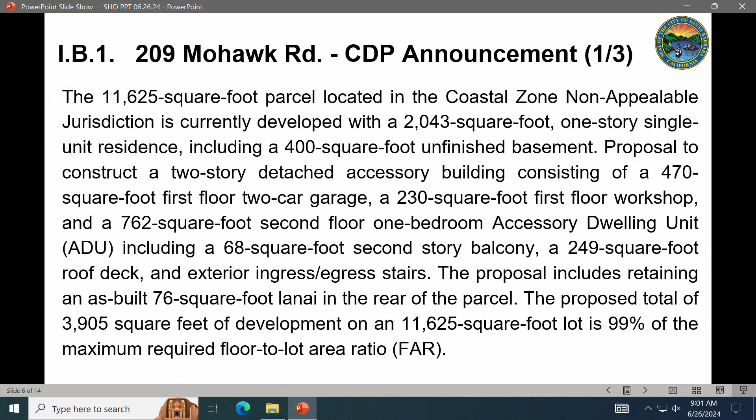The discretionary application under the jurisdiction of the Staff Hearing Officer is a coastal development permit pursuant to Santa Barbara Municipal Code, Section 28.44.110. When a proposed development includes the addition of an accessory dwelling unit to an existing single-family residence, the application shall be reviewed by Staff Hearing Officer without a public hearing in accordance with Subdivision J of Government Code 65852.2. Staff Hearing Officer shall not issue a decision on the application until at least 10 calendar days after notice has been provided to the public. Staff Hearing Officer may receive and consider written comments from the public, but without a public hearing. The announced decision will be the final action of the city.

Ms. Gu, I didn't see any written comments from the public. Were there any in the record? For this particular item, we did not receive any public comment.

Thank you. Very good. I'm appreciative of the staff report and the clear application submittal. I concur with the findings in the staff report and approve the project subject to the conditions in the staff report, and concur with the CEQA determination. That is the final action on the 209 Mohawk Road item.

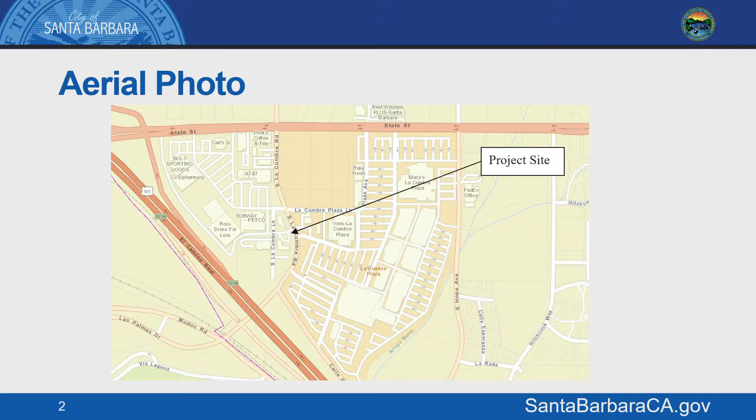There's like an echo.

So, as I said, the project involves two properties. The property at 110 South La Cumbre Road is developed with a 2,100 square foot, one-story non-residential building, and the property at 150 South La Cumbre Road is developed with a gas station, mini mart, and a hydrogen fueling station. The proposal consists of a lot merger to merge the two lots because the minimum lot size required for a car wash and gas station is about 8,000 square feet, so they have to merge the two lots. This slide shows that the lot size of 110 South La Cumbre is 5,600 square feet, and 150 South La Cumbre is about 31,000 square feet.

The general plan land use designation is commercial high density, and the zoning is commercial general, and it's also in the Upper State Street overlay.

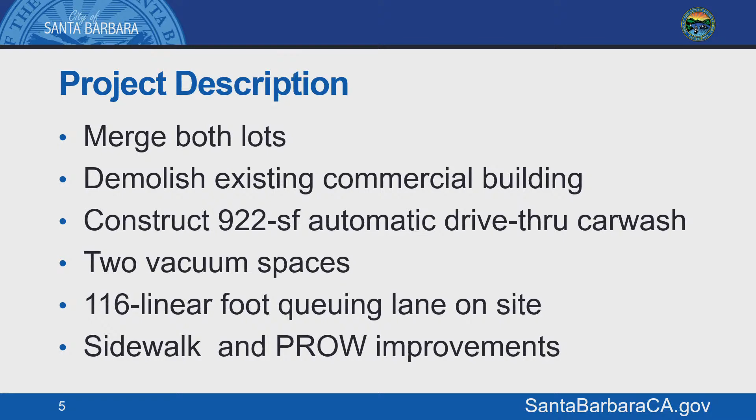I previously went over the existing development on the site. The project description is, as I said, merging both lots and demolishing the existing commercial building, currently a vacant veterinarian's building. They want to construct a 922 square foot automatic drive-through car wash with two vacuum spaces and 116 linear feet of queuing lane on the site. The project also includes sidewalk and public right-of-way improvements as shown on the project plans.

Here's the existing site plan, showing the gas station pumps in the center, that large square. Here's the mini mart on the upper part of the screen on South La Cumbre Lane, and to the right is the existing veterinarian's building, proposed to be demolished. In blue is the existing property line, which will be erased when they do the lot merger, and to the far left is the hydrogen fueling station.

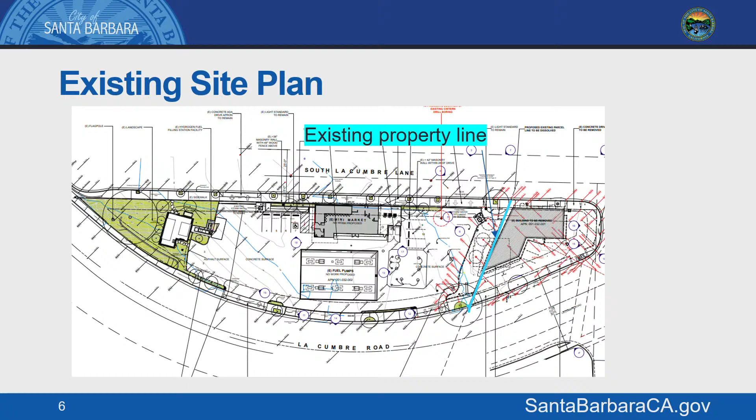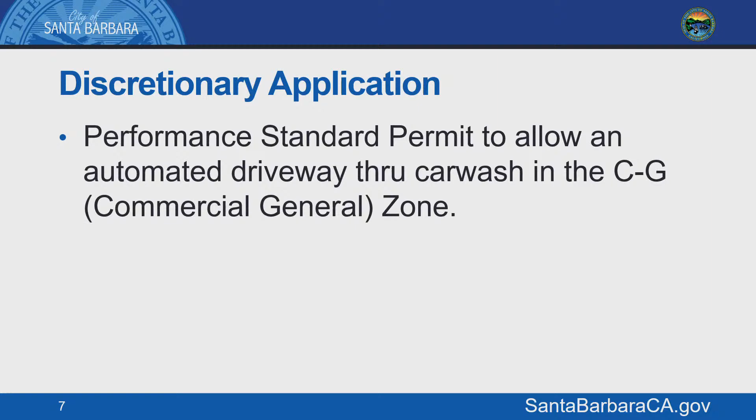The required application that is under the staff hearing officer's purview today is a performance standard permit to allow an automated drive-through car wash in the commercial general zone.

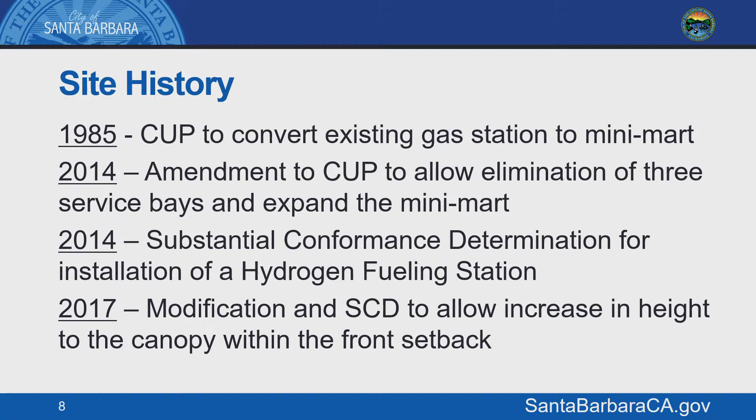To give a little history on the project site: in 1985, a conditional use permit was approved to convert the existing gas station to a mini mart. In 2014, there was an amendment to the CUP to eliminate the three service bays and expand the mini mart, and subsequently a substantial conformance determination was approved for installation of a hydrogen fueling station. Then in 2017, there was a modification and substantial conformance determination required to increase the height of the canopy above the fuel pumps, which was in the setback, requiring a setback modification.

To get into the nitty-gritty of the car wash, the design standards require a minimum lot size of 8,000 square feet, which is why they're required to merge the lots. Driveway entrances need to be a minimum of 20 feet from the intersection, with internal circulation from a shopping center—this does not apply to this project because it's a separate lot. A minimum 60-foot queuing lane is required; this project has 116 linear feet.

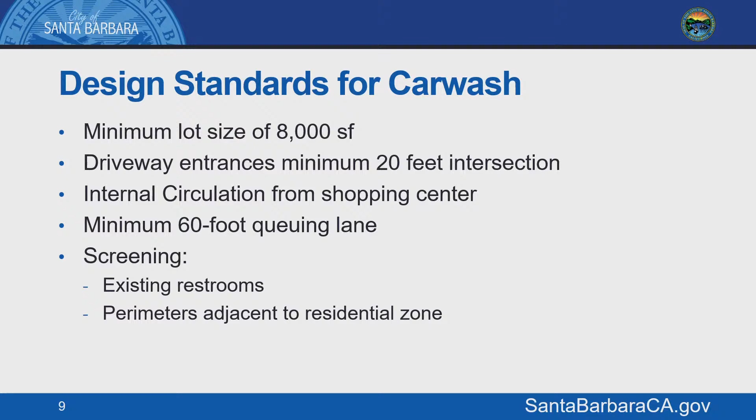There's also required screening for things like the existing restrooms and perimeter property lines adjacent to residential zones. This property is not adjacent to residential zones—it's bounded on three sides by public streets.

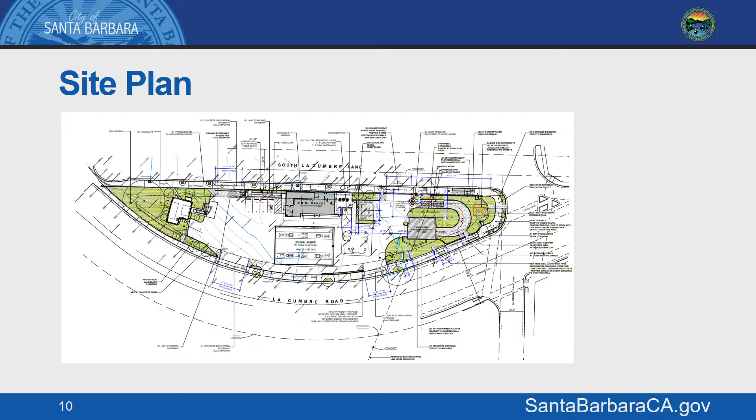Here's the proposed site plan. On the right-hand side is where the proposed work will be done, pursuant to the lot merger. The car wash building will be completely enclosed, as well as an equipment room. You can see the queuing lane, which will be entered from the gas station property, and the car wash vacuum parking spaces are to the right of the existing mini mart.

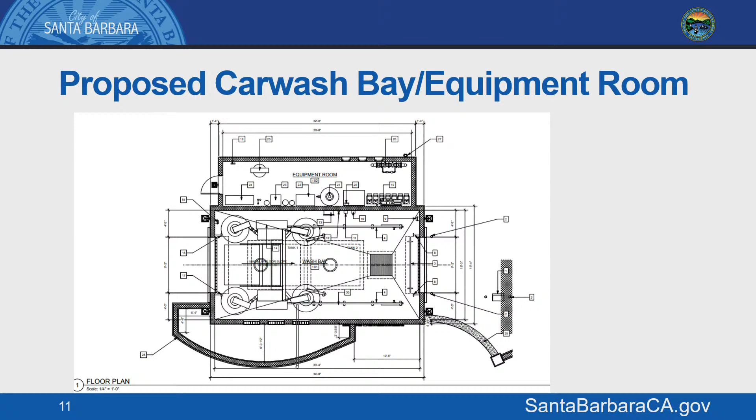Design standards also require landscaping. A 150 square foot planter will be installed at the corner of the intersection to the northern property line, and more than 10% of the lot will be landscaped pursuant to the required standards.

For operations and storage, there will be no exposed equipment or work areas. Hours of operation will be limited to 8 a.m. to 7 p.m. Noise levels will comply with the municipal code per a noise assessment provided by the applicants in consideration of any residential neighbors in the vicinity. The project was also reviewed by the Architectural Board of Review, and they were very supportive of the design and the landscaping.

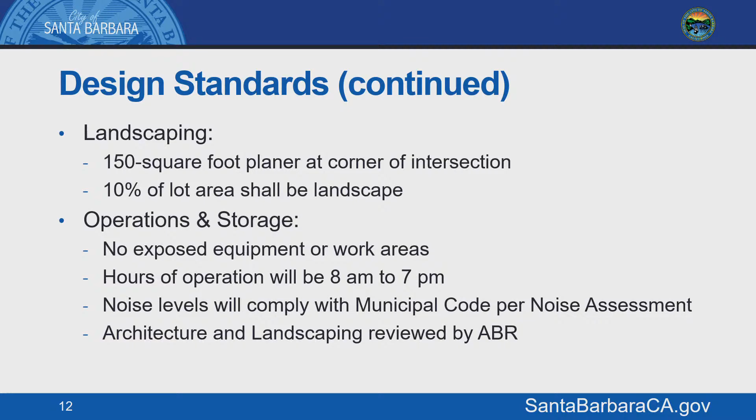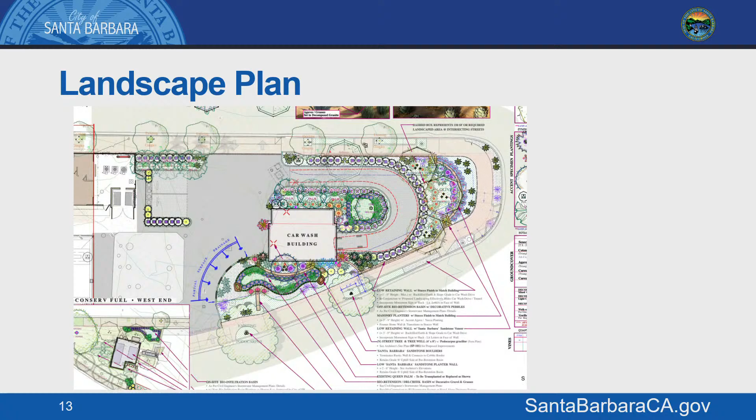Here's a landscape plan showing the required landscaping per the design standards. This also demonstrates how the project will comply with the stormwater management program, which was reviewed in great detail by the city's creeks department.

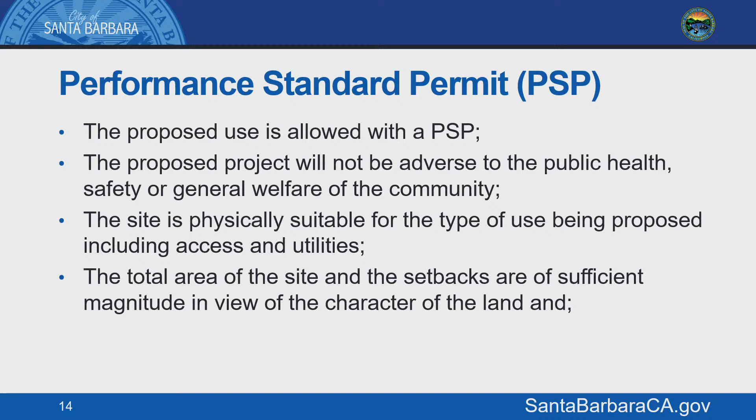For a performance standard permit, certain findings need to be made. The staff hearing officer must find that the proposed use is allowed with a PSP as stated in the zoning ordinance, that the proposed project will not be adverse to the public health, safety, or general welfare of the community, that the site is physically suitable for the type of use proposed including access and utilities, and that the total area of the site and setbacks are of sufficient magnitude in view of the character of the land. The project is located in the Upper State Street neighborhood and is compliant with the land use element as described in greater detail in the staff report.

The project is also compliant with the environmental resources element and the circulation element of the general plan, as described in the staff report. Staff reviewed this project for compliance with CEQA and found that it is a minor improvement to an existing developed site in an urban environment, with no environmental resources existing on or near the project site. The project is exempt per 15061, the common sense exemption.

There was an underground tank located on the project site where the gas station is. However, the work proposed is being done on the adjacent project site where the veterinarian's building is. Because the work is mostly being done on that site and the two lots are being merged, staff was able to find no reason to consider this project anything other than exempt per the common sense exemption.

Again, the project was reviewed by the Architectural Board of Review, and the board supported the design and layout. They requested more Spanish style and more landscaping, which the applicant responded to. They also have been sensitive to the use of lighting and fixtures and will comply with the city's lighting ordinance.

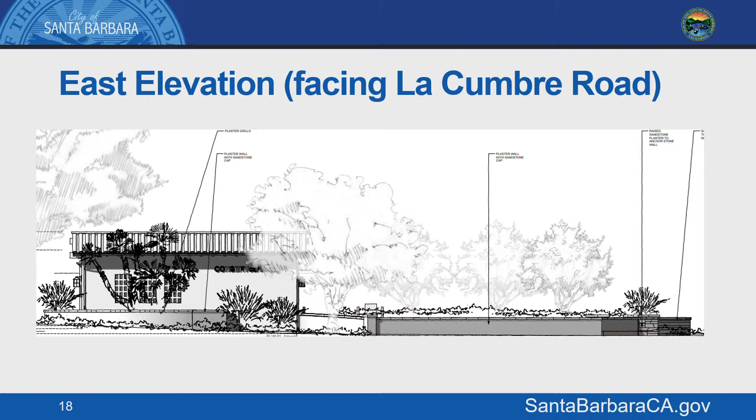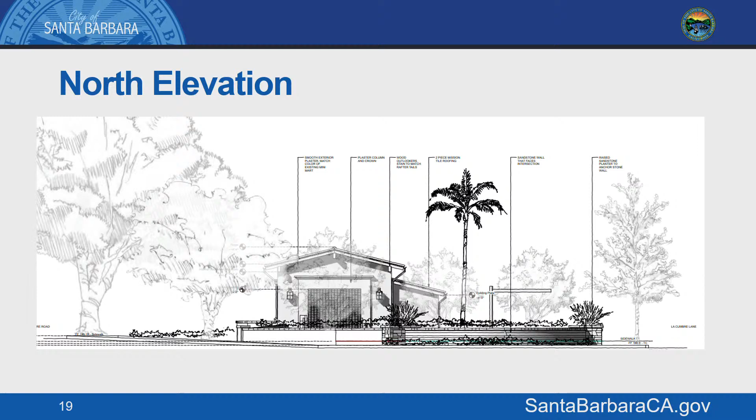Here's an east elevation, which is the most prominent view of the project facing La Cumbre Road. In the front, you can see the retaining wall, which would be the planter as required per the design standards. To the left, you can see the car wash bay. This other view is what you'd see from, for example, 5 Points Shopping Center, or as you're driving west on La Cumbre Road.

In conclusion, staff recommends that the staff hearing officer approve the performance standard permit, making the findings in the staff report and subject to the conditions of approval in Exhibit A. We do have the applicant team here to provide a presentation, and that concludes staff's presentation.

This is on La Cumbre Road, just as you leave the gas station property. There's a couple of curb cuts there, and it just becomes parking lot. We're proposing to extend that and go all the way around the property and merge up with the existing sidewalks that are there. You can see here, this is showing the sidewalk. It stops now about this location, and we'll be extending it all the way around with the boulevard strip and planting at this prominent end of the site.

The car wash vacuum bays will be in the current location where there's existing parking now for the mini mart. The queuing comes in from internal to the property and then comes out and exits the car wash bay here back into the property, allowing multiple exits from the facility. We're removing the driveway entrance here, and there's another one here that's all being removed. We'll retain the four driveways serving the facility as it is now.

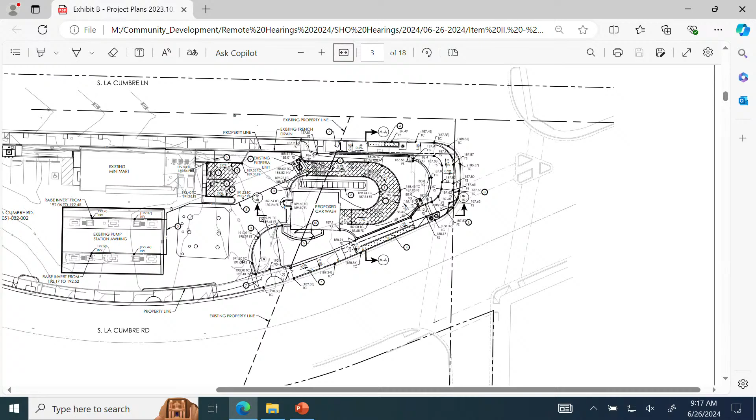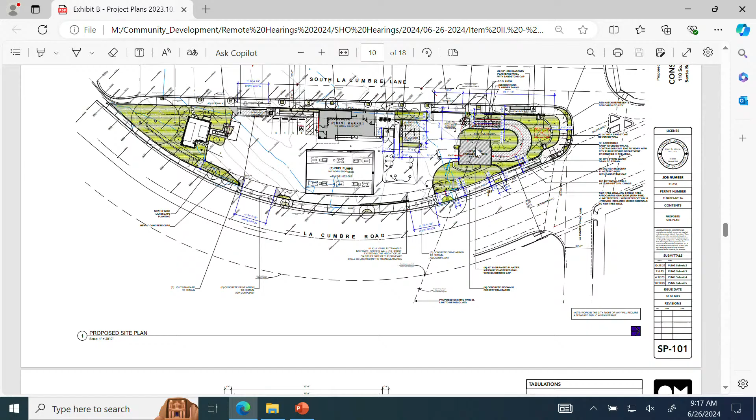Let me zoom out here. This is some of the creek stuff in terms of dealing with water retention on site and stormwater. That's the proposed site plan. You can see a little bit better with the landscaping. The majority of this site as it is now, at least where the car wash is going, is essentially entirely paved space — a building and/or parking lot now. You can see the difference with the additional landscaping we're adding to and around this building, and adding some more street trees too that were requested.

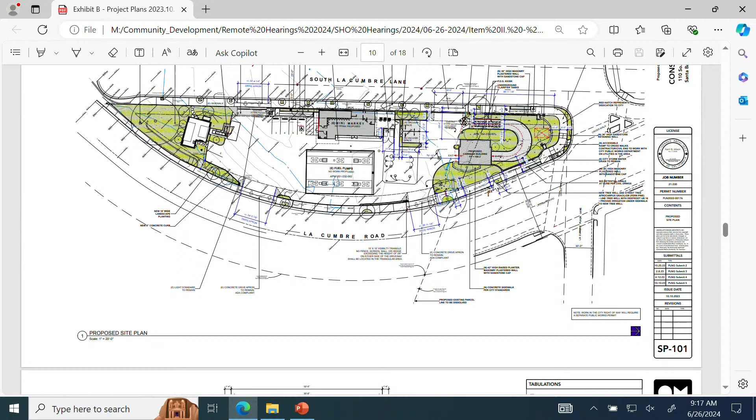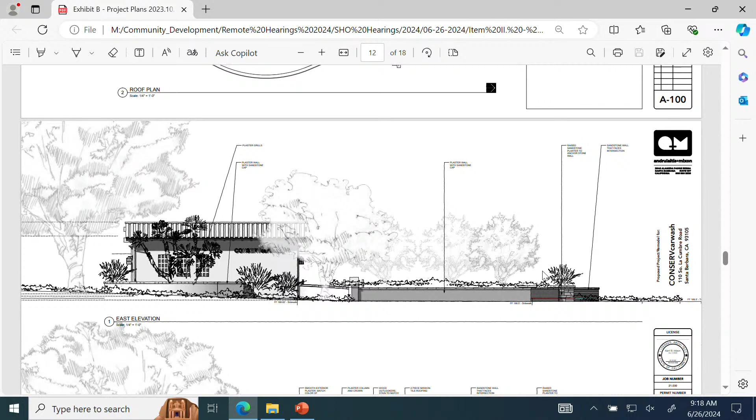So this, you can kind of see here, the screening that we worked with ABR on. This is a raised planter on the eastern side that allows for minimizing the visual impact of the building. And then we have a small retaining wall that wraps around the whole queuing lane, in addition to landscaping that Robert's providing, with the intention to help screen cars from the perimeter of the property that are in the queuing lane to minimize that impact.

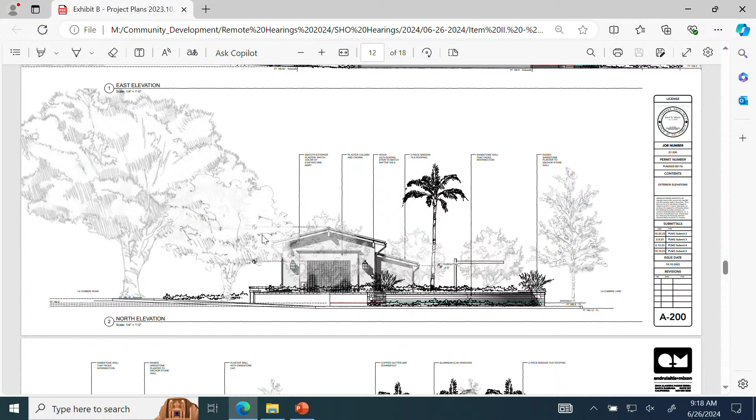And again, this is the view coming from State Street, looking at that building. We've grayed out, but these are all trees that wrap around the internal side of that queuing lane, with the intention to obscure the building. And this is on La Cumbre Lane side. You can see that wall continuing on.

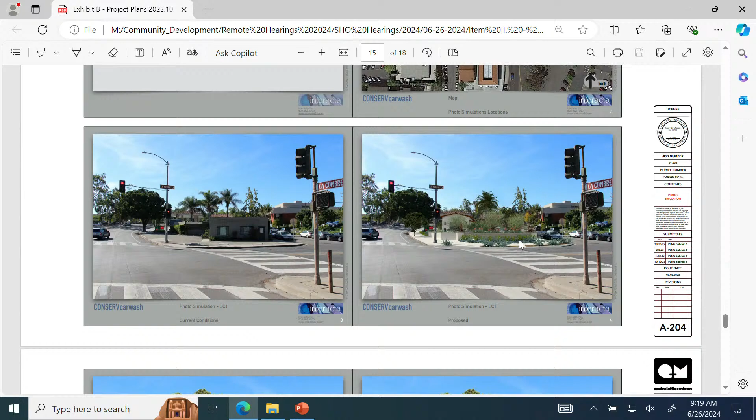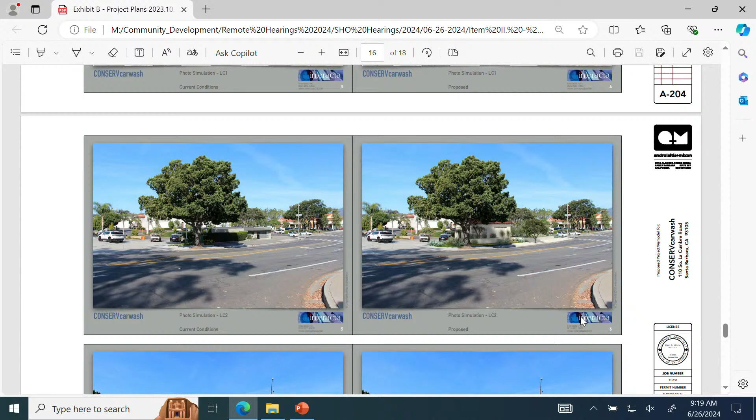Some of the architecture materials that we're proposing are Spanish style, and this shows some simulations of the existing building and what's proposed and what that would look like. This is from La Cumbre Road across the street, existing building, and then proposed. And this is standing at the corner of the intersection.

And building sections, and then Robert, I don't know if you want to take it. Sure, my mic's not on. I've been the landscape architect for all the iterations of this project, with the mini marts as they came in, and then expanding the number of pumps, and then the hydrogen fuel cell.

So if you look on the west end, the hydrogen fuel cell area is well landscaped, and part of the flavor of the landscaping was trying to blend what's been done, but by the same token, you have the AT&T building across the intersection that has a southwest Scottsdale, Arizona flavor. So I tried to pick some of that up.

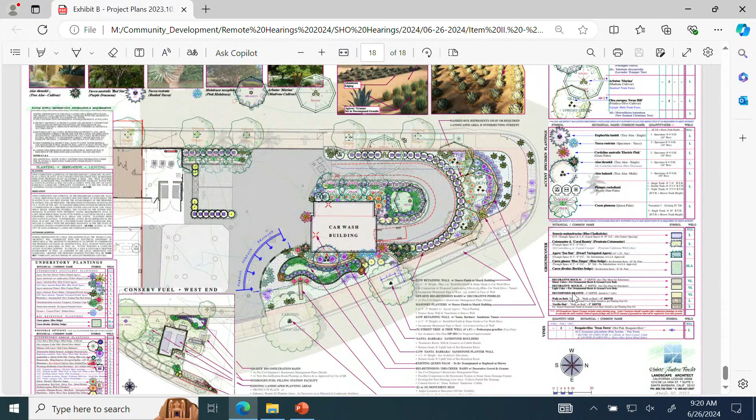And I don't know if you're familiar with this site, but it floods. So we've really tried, that was one of our focuses, dealing with the water on this site so we could eliminate that situation, with all the green spaces and working with creeks. I think we've succeeded in doing that. So again, it's just meant to fit into what's there, and I think that's about it. If you have any questions, I'm happy to answer.

Very good, thank you both. I did go out to the site. I noted that the driveway on the northwest end had barricades on it, and I presume that's from cut-through traffic, and was wondering how that would be managed differently in the future.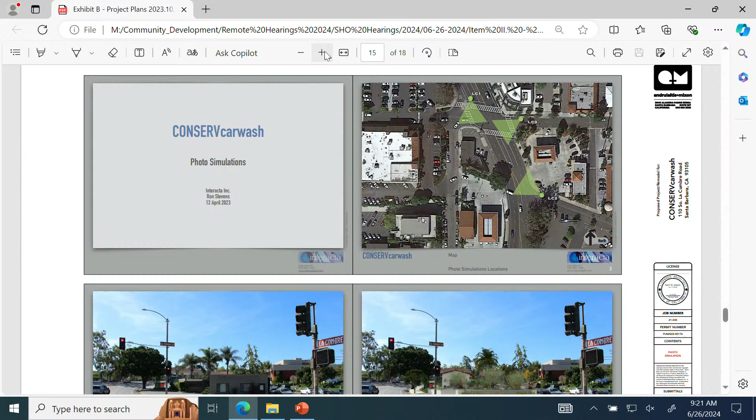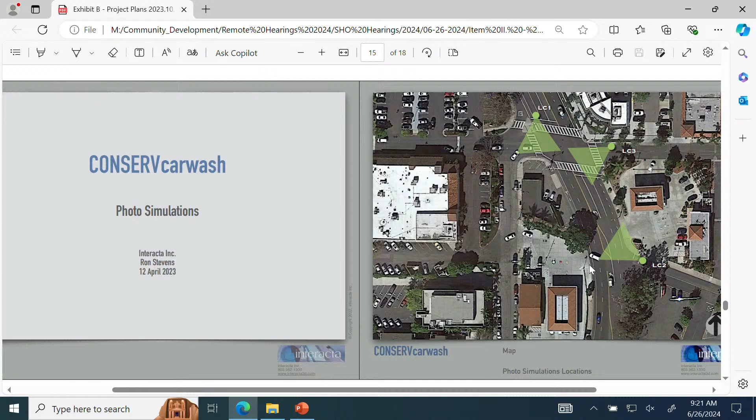Well, the reason they've put those up now is because the trucks that deliver to 5 Points cut through there because of the exit. I don't know if you could see it here in the site plan, you can kind of see it in this overhead photo. The delivery trucks for 5 Points come along the back side of the building, and when they exit, rather than making that awkward transition to that intersection, they just cut through our property. You can understand how that's an issue for the gas station. We need that driveway to just help serve the facility.

Hopefully just the use of that driveway for traffic going through to the car wash will help mitigate that, because it's going to be a little different now. That's not a very used driveway now from the gas station, and it's not serving where the car wash is going to be. So I think the traffic pattern through there internally is going to be much different now, and probably not encouraging for a truck to go through there.

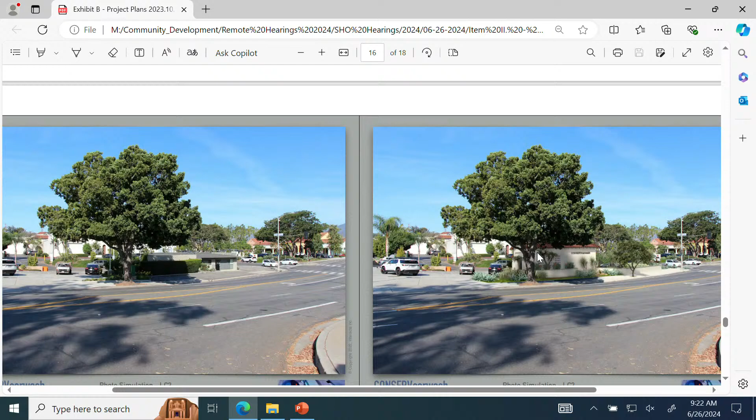Okay, thank you for that. And I appreciate the sidewalk dedication, the wider sidewalks, and the landscaping is a huge improvement to that area that needs more greenery for sure.

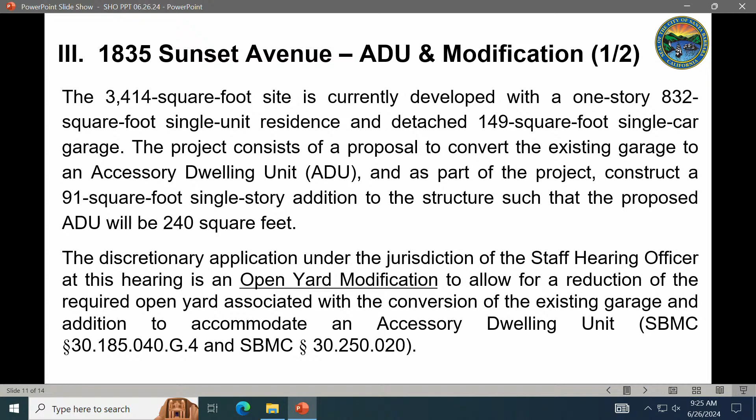Staff determined that this project is exempt from further environmental review under Section 15303 of the California Environmental Quality Act guidelines, which pertains to new construction or conversion of small structure facilities.

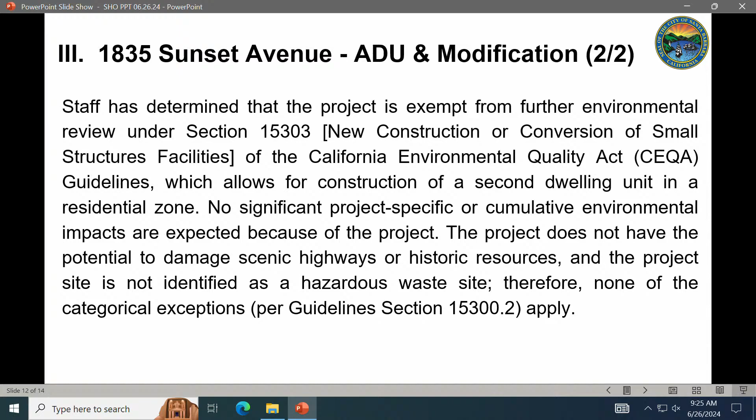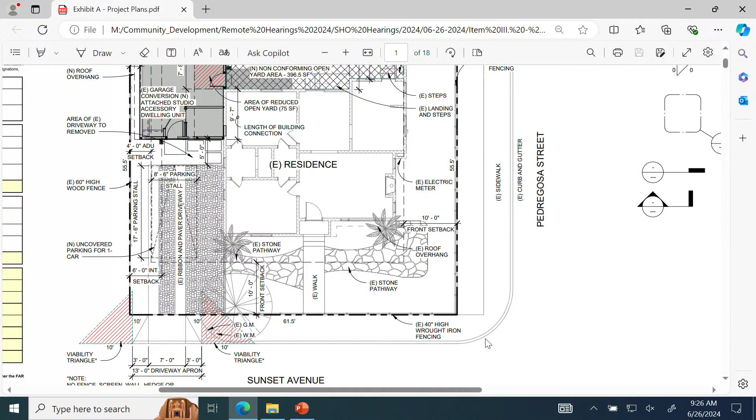As Associate Planner, City of Santa Barbara, I'll be giving the staff presentation for this project, summarizing the open yard modification being requested. The project site, 1835 Sunset Avenue, is a corner lot located at the intersection of Pedregosa Street and Sunset Avenue. It is subject to front setbacks, which you can see on the site plan: the 10-foot primary front setback off Sunset and the secondary front setback off Pedregosa Street. The existing site is developed with a one-story single-unit residence and a single-car garage.

The project before you is to convert the garage into an accessory dwelling unit that's a studio unit. As part of that project, they are proposing a very small addition to the structure, really to make it a more desirable floor plan for the unit. As noted in the project description, the unit is proposed at 240 square feet, so it's still a pretty modest size. There are some site constraints with the existing lot.

The requirement for open yard for just the residence, excluding the accessory dwelling unit being proposed, is typically 800 square feet with minimum dimensions of 20 by 20. Those open yard areas are intended to provide outdoor living space for the residential unit. It can't include areas used for vehicular purposes, such as a driveway accessing the garage.

It also can't be located within the primary front setback or the first 10 feet of the secondary front setback. As you can see on the site plan, even within the secondary front setback, a majority of the area that provides an outdoor buffered space is in that 10-foot area as well, so this whole portion cannot be included in open yard.

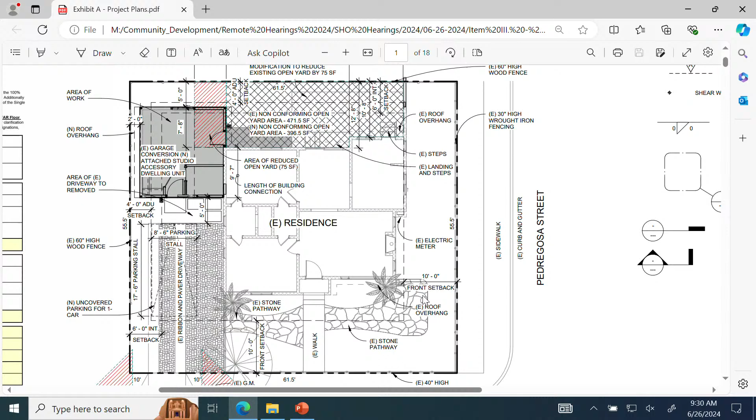The project is also categorically exempt, we found, per 15303, which allows for the construction of a new accessory dwelling unit on the lot. There's no environmental concerns that were noted for this particular project.

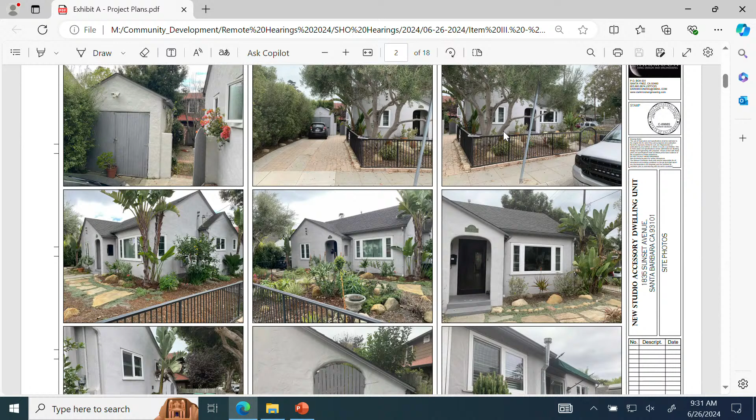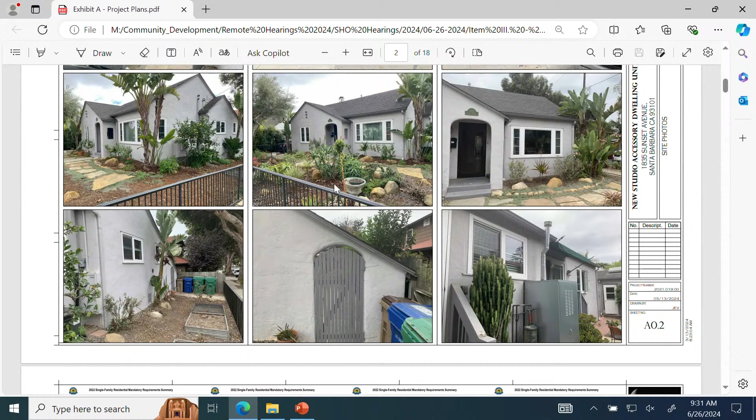I do have some site photos to show you really quickly. This is the existing residence, existing garage that's supposed to be converted. They're going to be pushing that towards the house to make it a little bit larger. You can see the front of the house has a lot of landscaping already, which, while that area doesn't provide the intended definition of open yard space, it can certainly provide some buffer between the public right-of-ways.

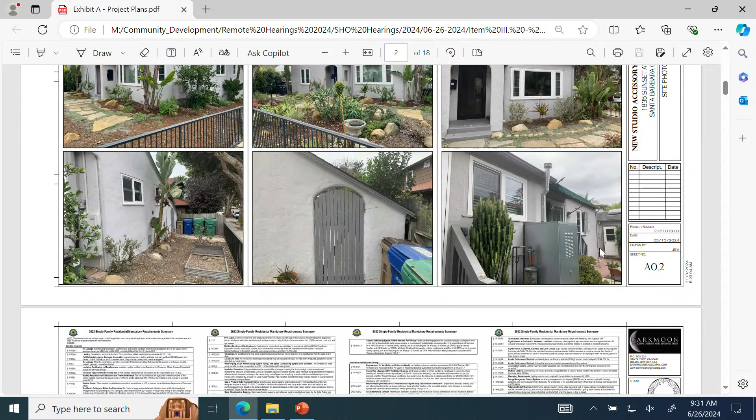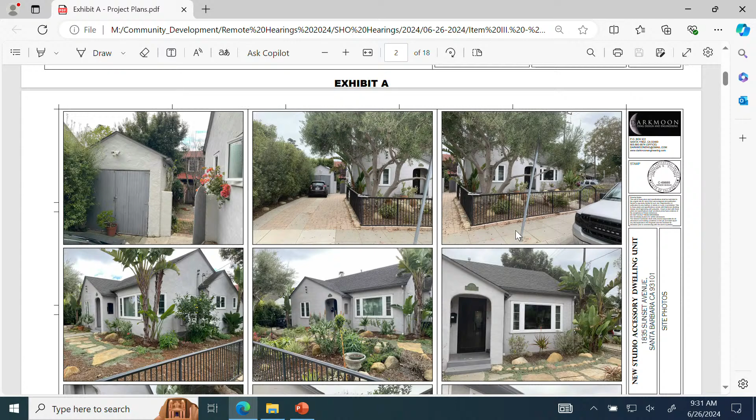This is where the gate is, this is that side entrance to the existing open yard. You can see a portion of the open yard here towards the back. So there is some open yard space at the back that will definitely be used. And again, the front areas, while they can't be included as part of the open yard, do provide some relief on the property. That concludes my presentation.

The owner and applicant are here as well, if they'd like to add anything. Thank you, Ms. Plummer. Would the owner or applicant like to speak? I think Ms. Plummer said it very eloquently, but, sure, I'll let you take over.

As noted, my name is Jonathan Villegas with Darkmoon Building Design Engineering. This was a fairly difficult site to even be able to provide an adequate ADU space for a very limited floor plan. The floor plan itself, even though it's not of great importance, is a very small, modest plan, and in this case we just found that this would be the most expedient way to add more livable space and still provide parking.

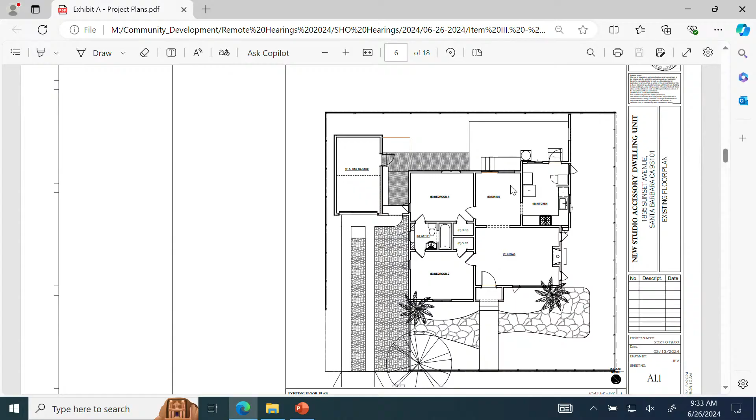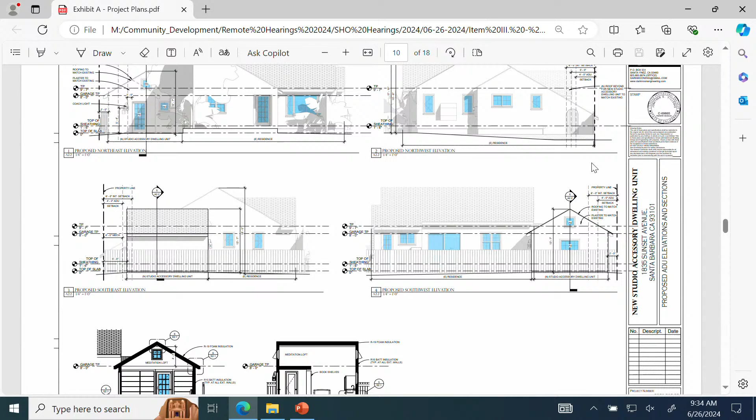Like Mrs. Plummer said, we had the option of not providing the additional parking space per the ordinance, but we did want to provide that so we don't put more strain on the street that is already strained with parking as it is. I know there's been a couple of letters from neighbors that made those concerns as well. We also are very conscientious of the existing architecture of the house, this early century architecture, and we matched that with our design of the proposed ADU. So we were very conscious of that.

Very good, thank you. Ms. Gu, is there anyone with their hand raised for public comment on this item? Upon checking Zoom, I do not see any raised hands for public comment, and I do not see any in the room.

Thank you. Very good, and we did receive just one public comment letter from a neighbor, Judy Bruskin, and she raised a couple of issues on this project. One, a general planning issue: she's questioning the concentration of ADUs in the area. And she's also questioning the wisdom of not requiring parking.

And I can address both of those. ADUs are throughout the city. There is a nice web map on the city, so there isn't huge concentrations in certain areas of the city. I was a longtime West Side resident. I know well the impacted streets to parking, especially in this area.